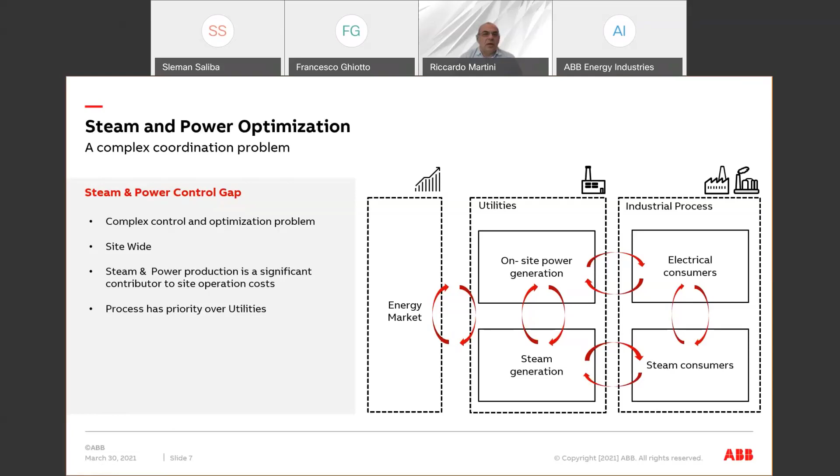At the same time, we see that steam and power production is a significant contributor to the site operation costs, but also that typically, and for obvious reasons, the process has priority over utilities. This has some impact, as in practice the need to compensate the disturbances coming from the process side may have a cost impact on the utilities that is not always fully calculated and understood.

What are the relevant industries? Well, first of all, certainly oil and gas, refining and petrochemicals, chemicals, industrial cogeneration in general, and it's also applicable to district heating networks.

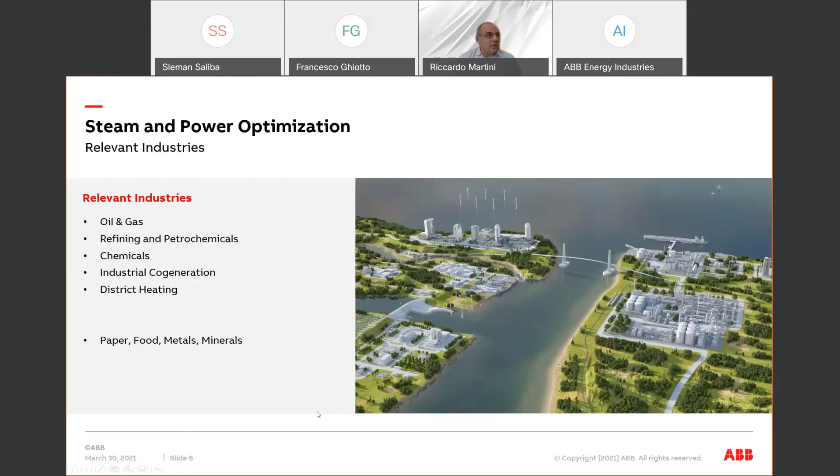More in general, also paper, food, metals, and minerals. Thanks, Riccardo. So you talked about industrial sites or utilities that have on-site power generation, that have steam generation and have the need to reduce energy cost and primary fuel cost. And all that is also coupled with energy markets and different prices for primary fuels.

So Riccardo, with your expertise, what's so complex about coupling industrial steam and power networks that you started in the first two slides? Yes, first of all, let's have a look at the technical challenges in steam and power control. Well, first of all, we have multiple equipment with different efficiency, different sizing, and very often different age. Moreover, there's typically a conflict between fast and slow dynamics, and there are some slow equipment like typically boilers and heat recovery steam generators. And we also have fast equipment like, for example, turbines or pressure reduction valves, to give a couple of examples.

Well, further complexity is also related to steam and power demand changes and variability on the demand. And also energy recovery related disturbances, like, for example, energy recovery in terms of steam, like from a steam cracker, or in terms of a CO boiler or off-gas availability. And also, I want to mention that there could be steam and power related events, like a trip in a turbo pump or in a turbine, which will have an impact on the entire steam network.

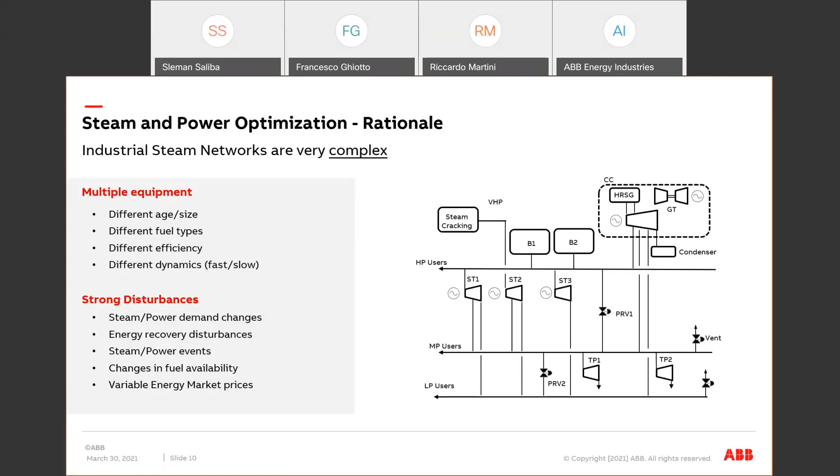Also, worth mentioning, changes in fuel availability. So, for example, if you are using fuel oil in the boilers that is coming from the process side, we may have to keep a tank level in a certain range, and that has an impact on the availability of a certain boiler for load changes. And finally, and you anticipated that in your questions, there's an impact on our management from the variability on the energy market, as prices can change significantly, especially in these days, and that should be taken into account.

What are further challenges? Well, first of all, steam and power, as we said, are strongly interconnected. So we would like to have a global management. So some kind of strategy in the automation layer, which takes care of both, considering their respective objectives. Well, there are some practical hurdles. For example, there are typically different automation systems, different control rooms and different organizations involved. Sometimes there are even different companies that are taking care of the process side and the power side.

But at the same time, what we can say is that there are opportunities. For example, and this is just an example, trade-offs between power and steam are often possible. For example, it's possible to use boilers as power boosters to help generation. And depending on energy price and fuel costs, optimal conditions change. So it's not trivial to understand what is best without considering the entire steam network. And a coordinated control would give us explicit economic benefits with tangible potential savings or additional revenues.

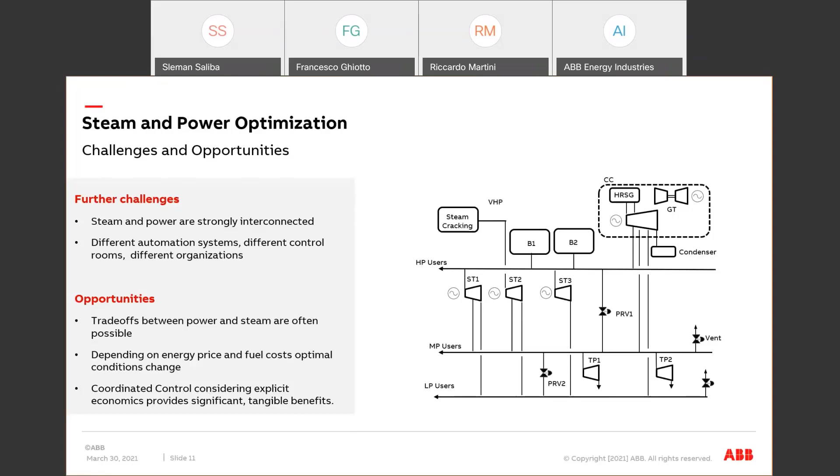Let's dig a little bit further on what are the benefits from a coordinated control. Well, first of all, turbines have different efficiency curves. They could be very different between each other, and there's also typically an optimal operation range for each of them. Boilers as well, they have different efficiency curves and also may use different fuel types, which can make a calculation of the optimal efficiency interesting and more complex than one would assume. And you can also consider the contract type and, for example, take into account fuel blocks when doing these calculations, so that we actually implement what's best from an efficiency and also from a financial point of view.

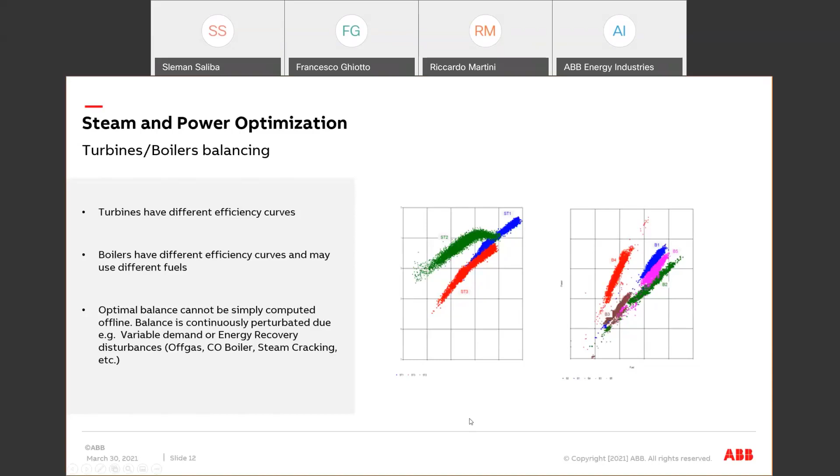It should be mentioned the optimal balance cannot be calculated only once, but it should be continuously performed as the balance keeps changing. Further motivations for coordinated control are related to minimization or possibly complete avoidance of venting. Venting is an easily spottable area of improvement, as it is certainly lost efficiency and lost money. But at the same time, rapid pressure swings require some control, and unless you have a coordinated control of multiple equipment, you end up venting more than necessary. So that's an area of interest.

Another area of interest is use of pressure reduction valves, as pressure reduction valves are basically bypassing turbines, so they have a negative effect on efficiency, and they also have typically a negative impact on the financials. And there are cases when the energy prices are particularly low, where it's interesting to use the pressure reduction valves and desuperheating, and we will see that in the demo.

But I want to mention that the use of pressure reduction valves should be based on an economic decision and not just because it makes it easier to control the steam network pressures. Condensation similarly could be beneficial or could be bad from an economic standpoint. Typically, it's more of the second case, especially if you're using conventional boilers or you're using post-firing to produce the steam.

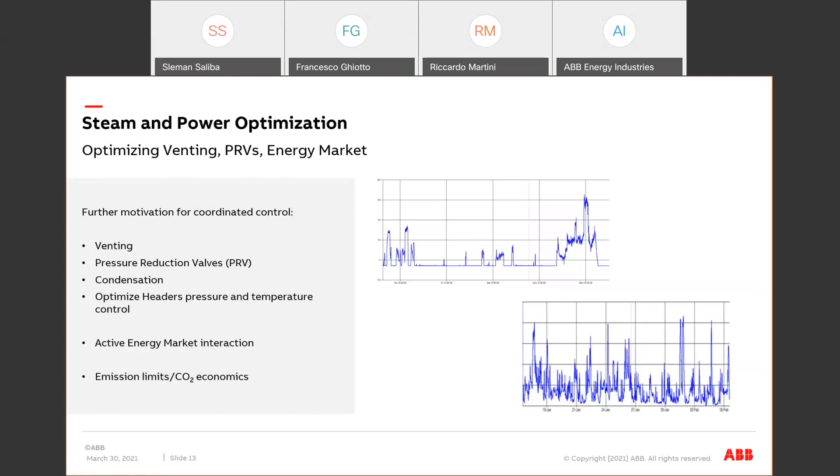Last but not least, coordinated control should also have an eye on emission limits, as the emission limits are typically associated with the average over a longer time horizon between 1 hour, 24 hours, or 1 month, depending on the local regulations. And this is not something that you can easily keep an eye on from a pure automation perspective. And also CO2 economics, as it's getting more and more necessary to keep an eye on those costs, especially in Europe and in the Americas.

So let's have a look at the technical solution that we have identified to resolve that. First of all, the idea is to have a coordinated control of steam and power using a standard software solution based on ABB Optimax software. The idea is to use 2 layers. The first one is based on an optimizer, which is able to calculate the optimal operating point considering nonlinear models and explicit economics. And with explicit economics, I mean also considering fuel cost and fuel contract types, and also having the ability to estimate the energy export or energy import related costs. So, the type of market and the type of cost associated with changes from that perspective.

And then a second layer featuring a steam coordinator based on model-based predictive control technology, typically called APC, which can drive the plant toward the optimum operating conditions while at the same time preserving steam network stability. I want to stress that steam network stability and quality of the steam on the network is our most important target and a priority over the financials. But when the steam network is in stable conditions and all the variables are close to their set points, then the software will pursue explicit economic benefit for the overall site.

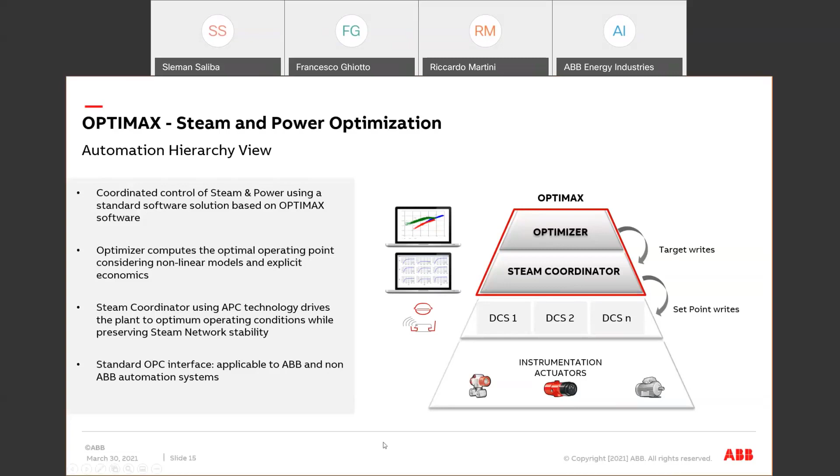And this is provided by a single solution based on the Optimax platform, which covers the two software modules that I just presented. And overall, it has a standard OPC interface based on DA and UA technology. This means that it's applicable both to ABB and non-ABB automation systems.

Let's dig a little bit further into the technical benefits. Basically, this solution can provide automatic control of short-term and long-term control objectives. And with short-term, I mean, again, steam pressure and steam temperature control. Long-term, we aim at targets that are a little bit longer in terms of time horizon, like energy exchange during the 15 minutes or during the 1 hour period, or whatever is relevant for the market. It also has the ability to implement flexible strategies, multiple objectives, and their explicit priority and economic benefits and penalties, so that we can consider all the variables before making a decision.

And the software solution also has embedded features for management of forecasting and energy management and energy market interaction. Real-time, intraday, day-ahead market, depending on whatever is relevant for the case. But the software has the ability and built-in interfaces to handle all that. It also provides a single HMI, a single console where you can supervise, monitor, and control an entire steam network optimization and also power control from a unique HMI, which is web-based and can be used by multiple engineers in parallel together with the operators.

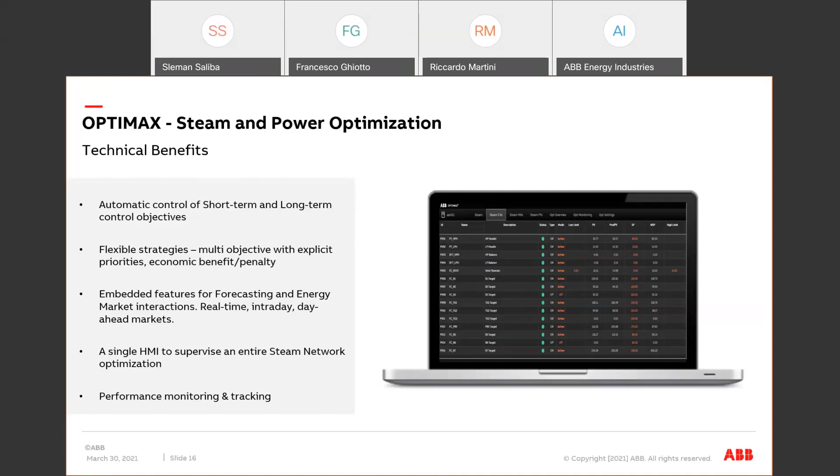It also provides performance monitoring and tracking, which is always important, but it's particularly important for energy-related markets, where being able to meet whatever was promised to the market could make a big difference in terms of penalties.

Wow, it looks complex, but when you explain it, Riccardo, it all makes perfect sense. Thanks. So you talked about the superior technical solution and its benefits, and we briefly touched on the fact that with steam and power optimization, customers can save steam cost, emissions, and all that with an attractive return on investment. Can you give us some details on that now?

Well, first of all, there are some direct benefits, first of all the increase in energy efficiency, which also has the benefit in terms of CO2 footprint reduction. Also, there's a production cost minimization, which we can provide by considering explicitly efficiency and fuel costs and fuel contracts and energy contracts together. If you are a net exporter or if you are actively buying energy on the energy market, then you can be more proactive in your approach to the market, which means typically more profits

or lower operating costs. And the typical benefits in our experience are in the 3 to 5% of the total steam cost on average, with a very good return on investment well below 1 year. And I want to stress that the degree of return on investment and benefits is also strongly related to how much you can be active on the energy market, and could actually be significantly more than that.

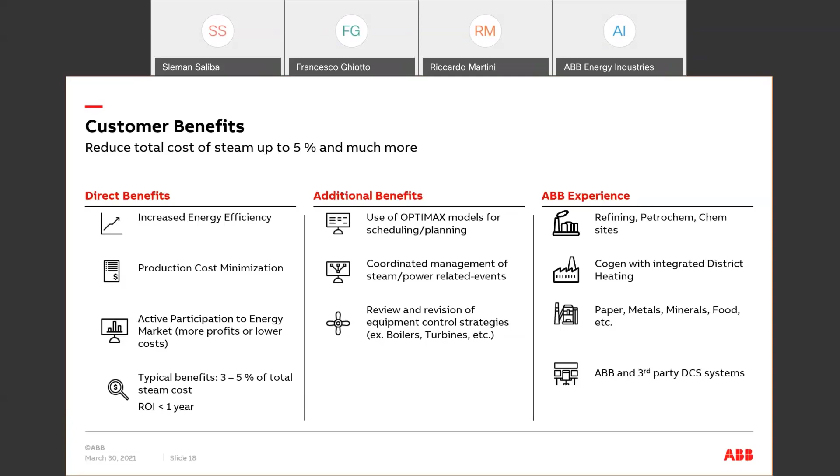A little bit on the experience. ABB has experience on refining, petrochem and chem sites, and also applying this technology in cogeneration with integrated district heating, and paper, metals, minerals, food as well. And the experience from ABB is not only on ABB automation systems, but also on third-party systems. Actually, in most cases, as it is site-wide, it is a combination of multiple DCS systems, so not just ABB, but also third-party. It's kind of the typical case.

Thank you, Riccardo. And for you on the call, you can now see an exclusive demo of the system. Well, first of all, you are going to see a full interactive demo with a simulation of steam networks, boilers, and turbines, and DCS logic via an 800xA soft controller. The idea is that by having a soft controller, we provide an environment for simple simulation of the process and DCS logics. And then we will see a web HMI that will be used for monitoring and command of power, energy, and also steam.

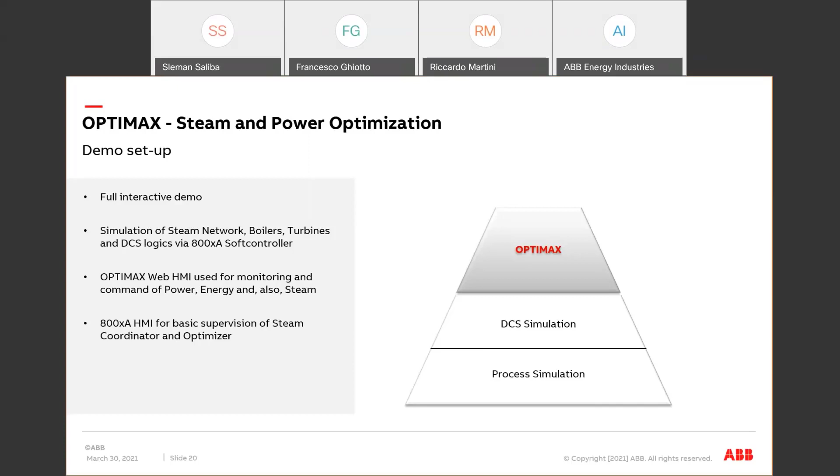And finally, there's also an 800xA HMI for basic supervision of the application, which is available, but you can get full information from the web version. Okay, very good. So as Riccardo was mentioning, we have a DCS layer in this simulation, which is using an ABB soft controller, which has built-in functionality of 800xA to emulate a process and also DCS control logics.

Okay, but I will not spend a lot of time on the DCS part, because as we are mentioning, we are using ABB DCS only because it's easier for us to simulate the process, but the solution works perfectly with any kind of DCS since it uses the standard OPC communication.

Okay, so here you are seeing a DCS graphic display of the steam network that we are gonna deal with today. We have two pressure headers, one high pressure header and one medium pressure header, 82 and 13.5 bars. And we have several boilers with different fuel types. So here on the right, you see the fuel types. So basically boiler one is oil fueled, and we have two natural gas boilers on the high pressure header. Plus we have a heat recovery from a steam cracking unit producing 119 tons of steam in this moment.

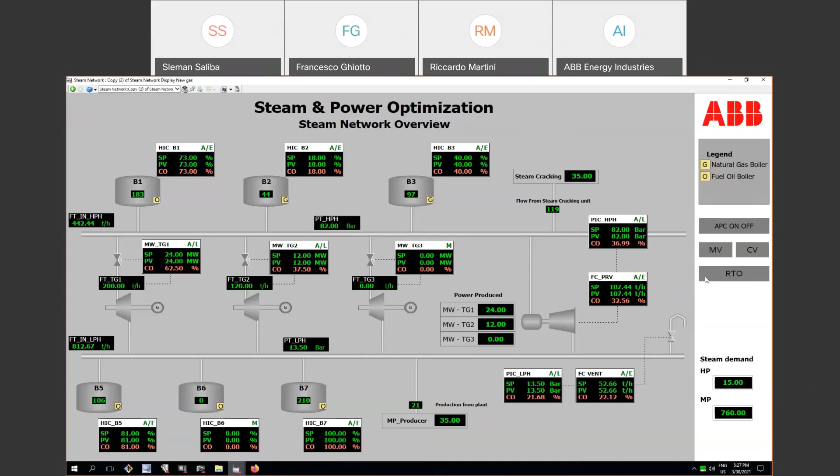As we are dealing, we can have DCS displays, but I will not show you these DCS displays, since I think it's way better to directly jump into the Optimax web interface. So this one that I'm showing you is basically the web interface of the optimizer solution. As you can see, we have several tabs here at the top. The first 4 of them are to monitor and command the steam coordinator, if you remember the automation pyramid that Riccardo showed you. And we have 3 tabs to monitor and command the optimizer.

So this one is the overview of the steam network. So as you can see, it's possible also to replicate DCS displays on this HMI. And as you can see, we have for every boiler the current production in black, the optimal production calculated by the optimizer in green, plus the operating range of the boiler. Okay, so as you can see, all boilers have different operating ranges, but also different efficiency, and I will show you this in a while.

And in addition to this, the optimizer is also reading the actual cost of the raw materials. So we have a fuel oil cost, a natural gas cost, and an electricity cost. So in this case, you can see that we have a very high oil cost, which is way higher than the natural gas, and a good electricity price. These are in dollars, okay? And we also have the steam demand, okay?

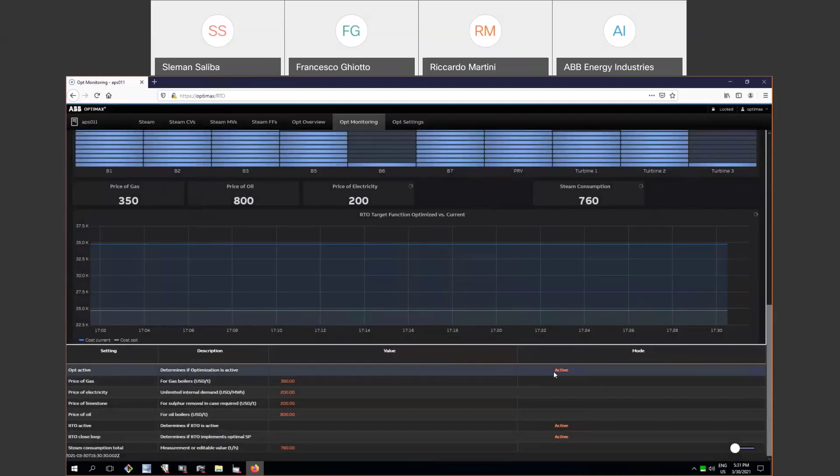So what we can do now, in order to implement and to really optimize the system, is basically to switch the optimizer from the open loop mode, so only from advisory, to closed loop system. And when we close the loop, what does it mean? It basically means that the optimizer will start to move and to write set points on standard DCS loops.

So if we go to the steam coordinator list of objectives, you will see that here we have the list of the targets for the optimizer, and if we have a deeper look, we can see that we have high pressure header and medium pressure header stability in terms of pressure control. We also have some constraints in terms of mass balances and also in terms of venting minimization, okay?

And from PV6 till PV15, we have basically the list of optimal targets calculated by the optimizer. And these targets from PV6 till PV15, they are at a lower priority, okay? So basically the main target for the coordinator is to keep the pressure of the header stable, okay? And how can the optimizer do this?

So if we go to the list of the manipulated variables of the coordinator, we can see which set points we are actually writing on the standard DCS control loops, okay? So you see in the mode column, we have some equipment that are in auto and some of them, they are in manual.

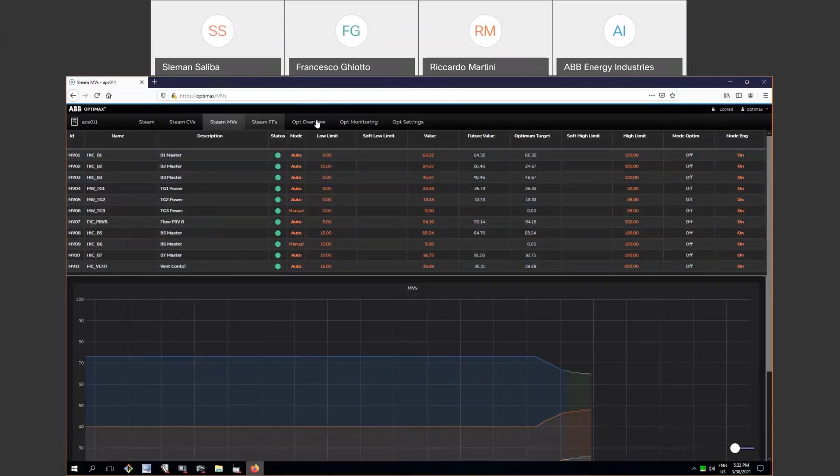So for example, I mentioned in the beginning that turbine 3 was simulated in manual mode and was off. That's why it's not taken into account in this moment. And the same was for boiler 6, which was out of service. Okay, so this is why they are in manual. So basically, these are the set points that our coordinator is writing. So let's go back for a second to the monitoring tab.

And if you see immediately here at the top, you see that the production of the items is starting to move now that we are closing the loop, okay? And if you go down here, you will see that actually in these bar charts, the numbers slowly decrease because we are actually slowly approaching the optimal solution. And also you can see immediately that the actual cost of production is decreasing, okay?

Of course, in this demo, the dynamics are actually faster than in a normal plant because, you know, we don't have too much time to wait for steady state. But of course, the coordinator always has a higher priority on pressure and tries to optimize the system at a slower rate, okay? We can also do a couple of tests, which I think are pretty interesting.

If we go again to the overview tab, okay, I can show you what happens when you change these costs; in a real plant, they will be read via internet or via PI system or via, for example, an energy broker for the electricity. Okay, so let's first see what changes if we make, for example, the oil cost less expensive. Okay, now the optimal solution would be, as you can see here, to maximize boiler 2 and boiler 3 production, and also to maximize the two steam turbines.

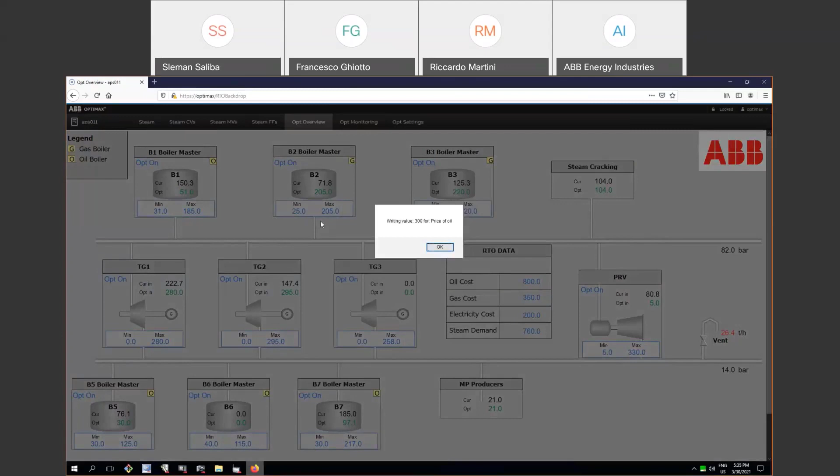Okay, so let's see what happens if we make, for example, the oil price lower than the natural gas price. Let's wait a bit for the optimizer to read the new value. Okay, you see here now that the optimal load allocation changed, because what it is suggesting is to maximize the oil boiler on the high pressure header and to minimize boiler 3, which I can tell you has a lower efficiency than boiler 2, and I will show you this in a while, and also to still maximize turbine 1, but not turbine 2, which has a lower efficiency than turbine 1, and I will demonstrate this.

And also we moved some of the production from the high pressure header to the medium pressure header because now boiler 5 and boiler 7 are maximized, okay? So let's go back for a second to see what happens to our cost function. You see, when you have a change in the price of raw materials, of course you have a step in both optimal and actual cost of production, okay? And also this bar chart changes because it changes the optimal load allocation.

But immediately you see that the blue line is slowly decreasing again, because immediately when there is this change, the optimizer is reading the new optimal target and is trying to achieve this new target. Okay, so if we go back here, you will see that we have a change in the production. So we were, for example, decreasing the load of boiler 1, and now we are increasing it because we changed the oil price.

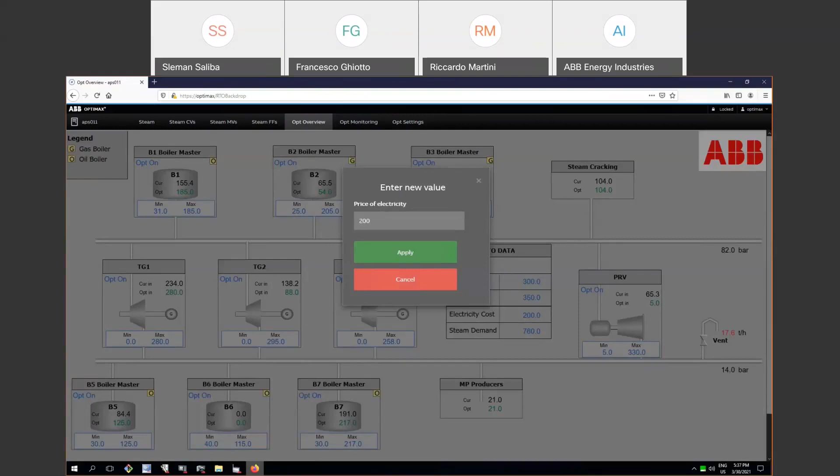And the last example that I think is good to show you is regarding the electricity price, because this makes a lot of difference in our optimization. So let's try the test Riccardo talked about. Until now the pressure relief valve was always minimized, but when you have a low electricity cost, it doesn't make sense anymore to use the steam in order to produce electricity. So you see that the optimal allocation for the turbine now is basically 0, but the software is suggesting us to use the pressure relief valve, because you have the attemperator after the pressure relief valve that produces more steam, and so it makes it more convenient, okay?

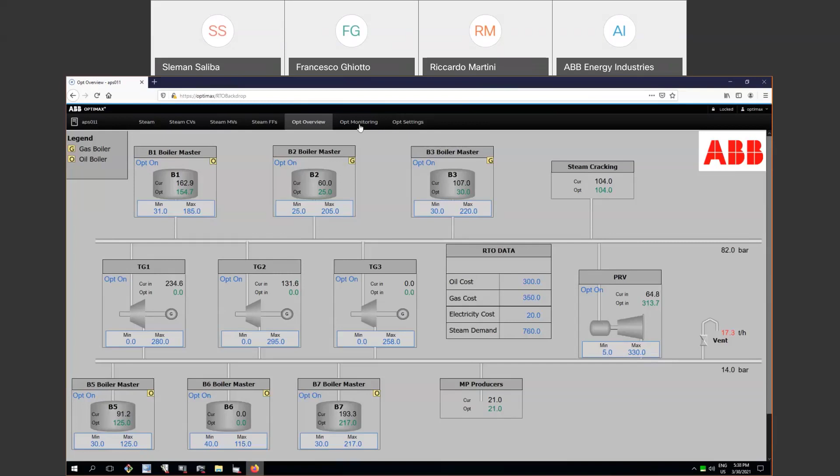And so we can go back to the monitoring tab once again here, and you will see that we have again a step in our cost function, but again the blue line starts to decrease immediately. And if you look here, now that we changed the electricity price, we have the pressure relief valve and the 2 turbines that are very far from their optimal load allocation, but the boilers are much closer to the solution, because we didn't actually change the price of gas or of oil.

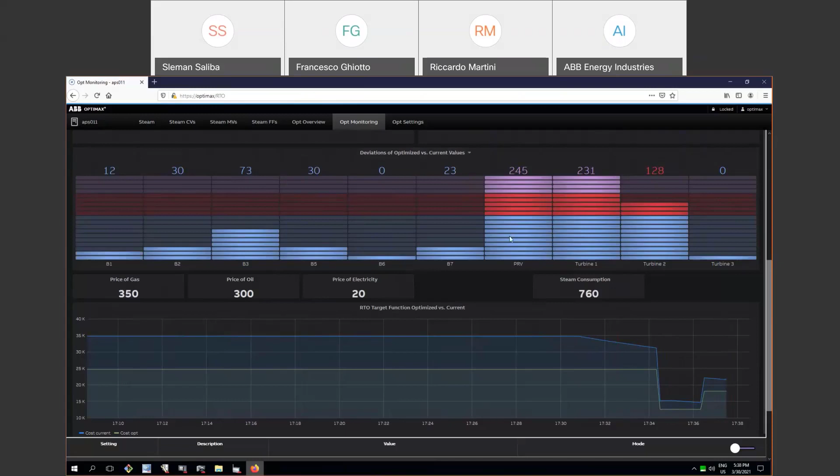Okay, so this is the main idea behind this, but I think I still need to show you a couple of interesting things. So let's go to the optimizer settings. Just to give you a small explanation, I mentioned that we are also taking into account the efficiency. So here we have these 2 coefficients regarding the efficiency of the single equipment. If you check, for example, boiler 2 and 3, you will see that boiler 2 has a higher efficiency than boiler 3, as I mentioned before. And also, if you check the turbines, turbine 1 has a higher efficiency than turbine 2, and also than turbine 3, which has the lowest efficiency, but in this demo was in off mode.

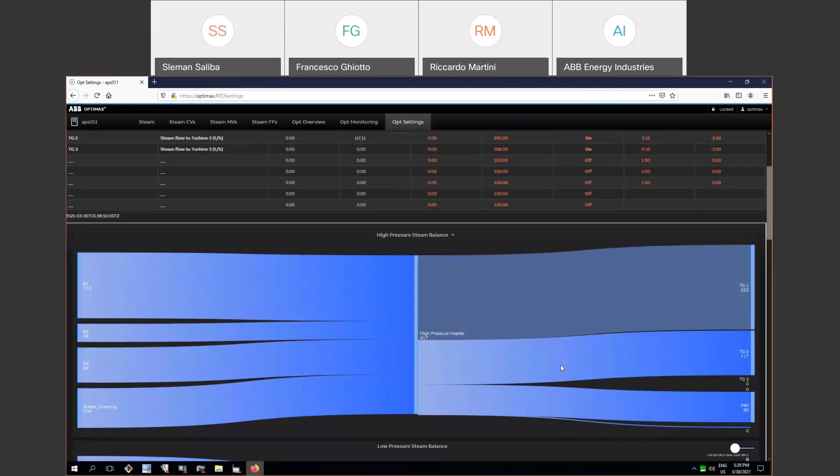Okay, and last, I think it's still pretty interesting to have a look at the visual representation of the mass balances on the 2 headers, because this gives you an immediate representation of the flows in your system. So basically, we have this Sankey diagram which shows you the steam distribution in your network. For example, we have the producers on this side and the consumers on this side. So this is the high pressure steam balance.

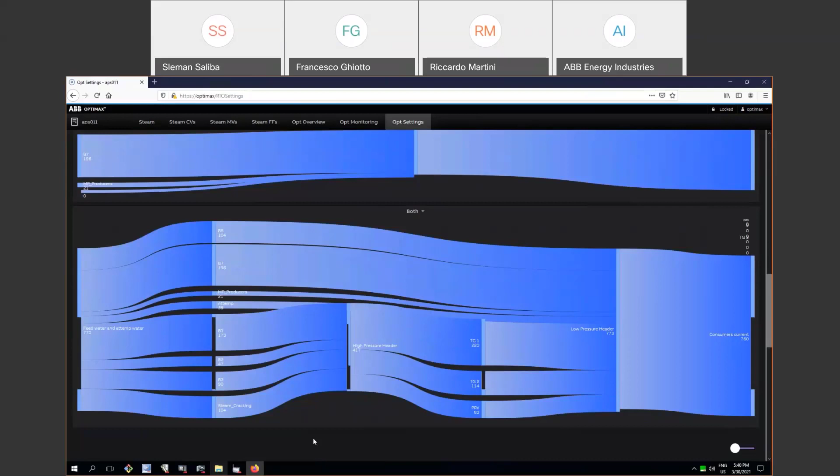And we also have the same representation for the low pressure, but also for the entire network, starting from the feed water on this side till the consumers on this side, okay? And we have the high pressure header here, and also the low pressure header here. And this gives you a direct representation of whether you have any losses in your system, or, for example, if you're venting. And so I think this is pretty interesting.

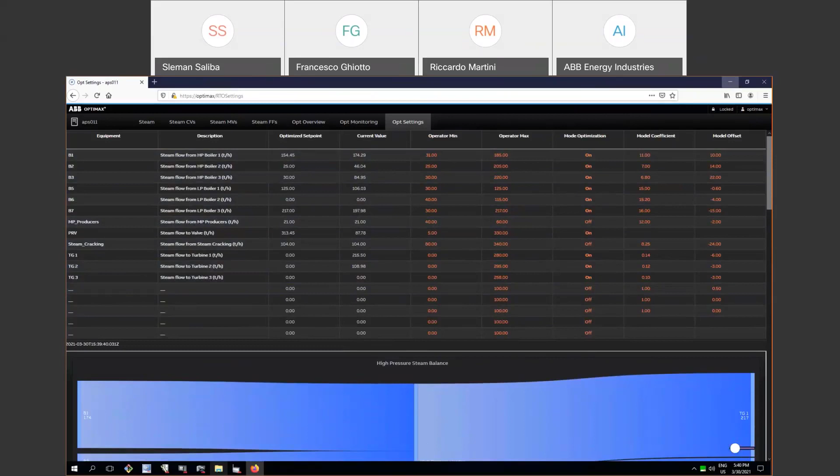And I think these are the main things. Of course, we can go a bit more into detail if you are interested, and maybe you can ask us for a more detailed overview. Okay, and so we can go back for a second to the presentation.

Thank you, Francesco, for the great demo. As Francesco already said, we can give you a more detailed demo on the system, and we are also happy to show you more on that.